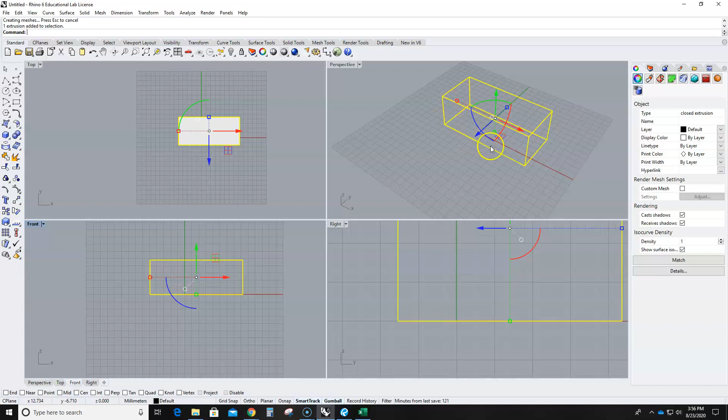This view would be if you're standing here looking that way - that's the front view, or this face right here. And the right view would be if you're standing on the right side of your object looking this way - that's actually this view right here.

And of course your perspective view is your 3D view. For basic navigation, if you right click on your mouse, you can move your view around on the orthographic, or 90-degree, views like top view. In front view, again your right click lets you move. Once you click on a window, it activates that window, and you know you're on that particular window when it turns a bluish color.

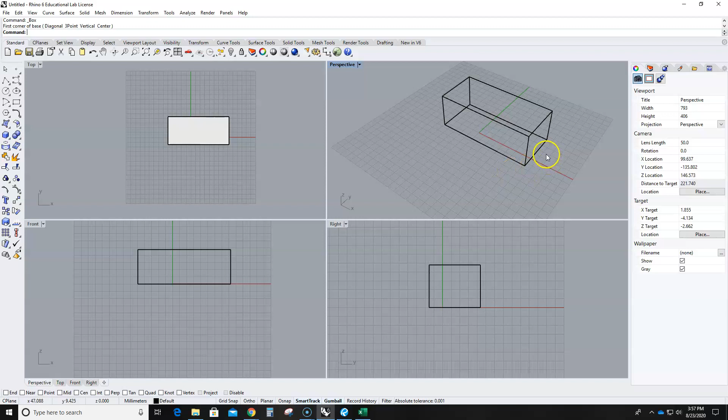So if I click on this, the perspective will turn. Now in perspective, your right mouse button will actually allow you to rotate and pivot. If you hold down Shift and then click your mouse button, it'll allow you to pan. So if you don't hold down Shift, it'll rotate, and if you hold down Shift, it'll allow you to pan.

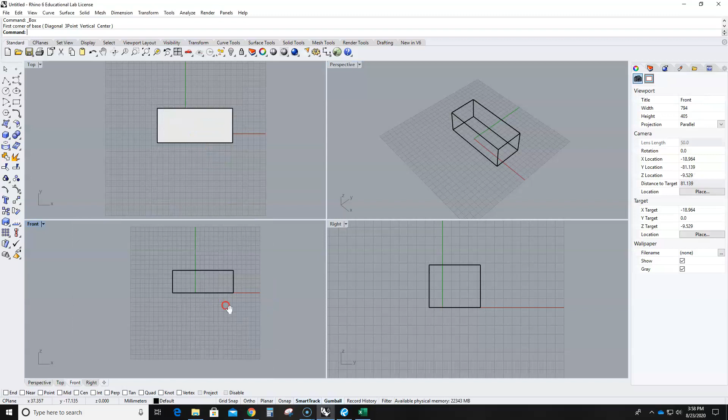And of course, if you're going to zoom in and out of your model, you just use your scroll button. Again here, you just use your scroll button. That's your basic navigation strategy in Rhino.

Before we start our first project, which is a series of tables and chairs, I like you guys to change your units. On the command line, which is up here, just type units - by default it's going to be in millimeters. You want to change that to feet or inches. In this case, we'll just leave that at inches for now, since we'll be modeling smaller projects. And that's it, really.

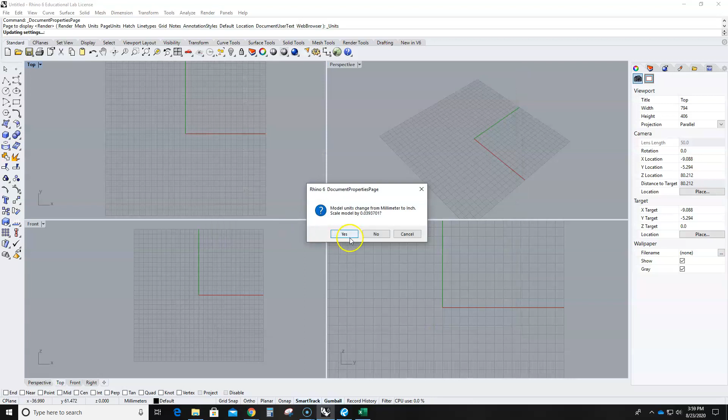So now whenever I draw a line, let's say, and I say make that line 12, it'll make that line 12 inches. 36, and that line is 36 inches. My units are going to be in inches.

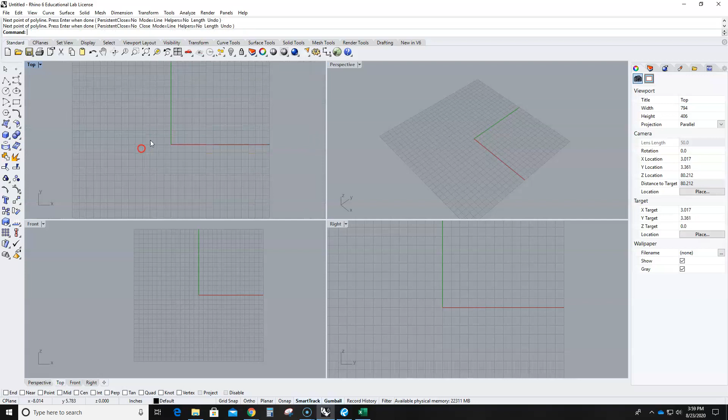So let's first make our first table. For now, I don't really need you guys to worry about the size of the table - we just want to navigate. What you want to do is make sure you're hitting the standard tab, and you'll see that the tools change depending on which tab I'm using. These are just your standard tools, which has some of all the tools we use the most from all the other tabs, so you can see these quickly. Just come down to standard for now.

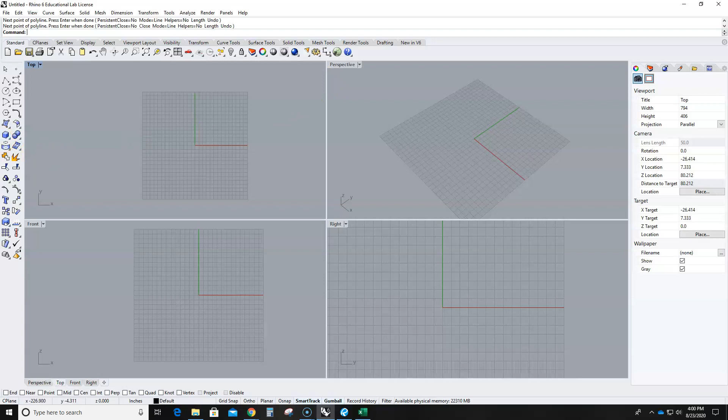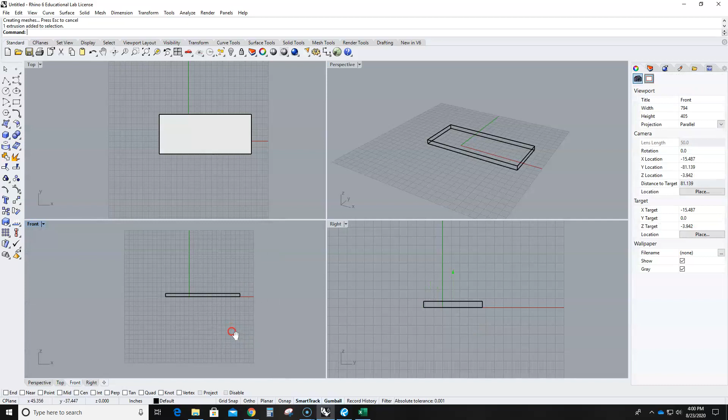We're going to just use a regular box, and we're just going to click and click. If you notice on my third click on my 3D screen, the box is getting thicker. I can move my mouse to the perspective screen and zoom in to make a box that's kind of a tabletop. Notice on my front view, this red line represents my 0, or the floor, so I want the top of my table to be a little bit elevated. I'm simply going to my front view, click on this object, and then you'll see this thing called a gumball.

And if you don't see it, you'll find it here. So if that's off, if you don't see it, you want to make sure that you click gumball. And then from here, you're just going to raise it up to a certain height.

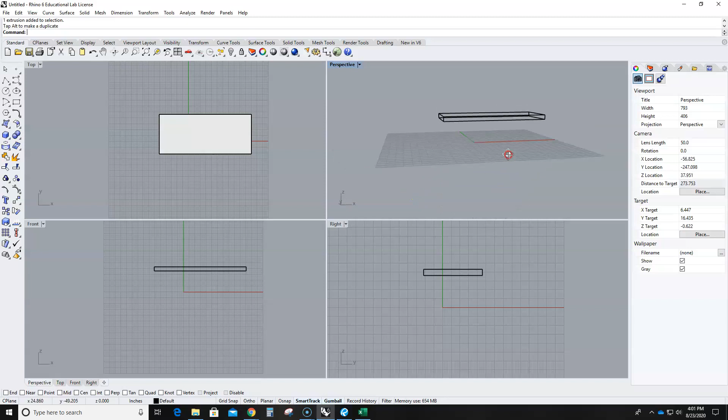I'm not really worried about the height at the moment, but just teaching you guys how to draw a box. And then I'm going to come back to my top view, and I'm going to make a leg table of a certain size, right? And I'm going to go back to the front view here, and I'm going to make my legs.

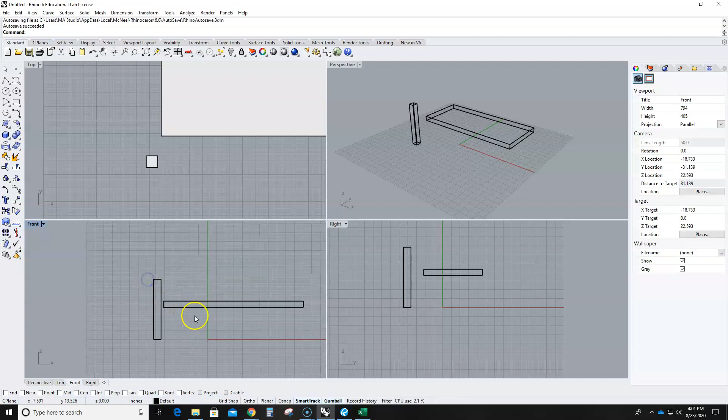Actually, let's make the legs a little taller, which means that I'm going to move my box up a little higher. And then come back here to my top view, and then move my legs to the corner of my table here.

So what I want to do also is here on my top view, I can go into my wireframe so I can see through. And then for now, we're going to just move it.

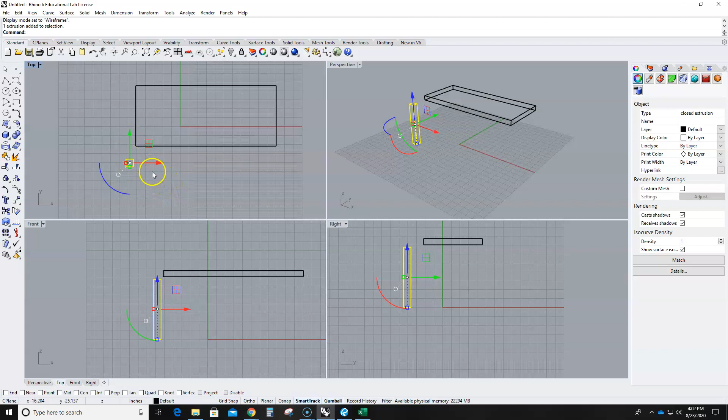So moving things in Rhino is actually quite handy with the gumball. If I hold down this red arrow, or hover over it, I can move it just in the red axis, which is the x-axis. If I hover over the green arrow, I can just move it exclusively on the y-axis. If I hold on to this grid, I can move it kind of freely, right?

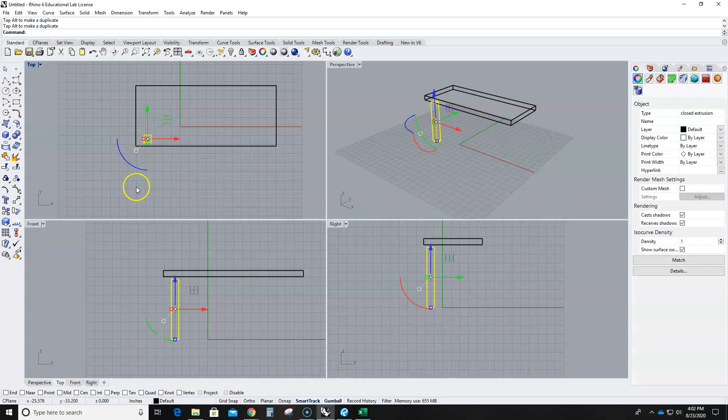So I'm going to just, for now, move it there. And then let's just make sure that these things are snapped together. So I'm going to click here, and I'm going to go to my move command. Instead of just moving it freely like this, I'm going to go to my move command, which is MOVE, enter. And then I want to make sure that I have my object snap on.

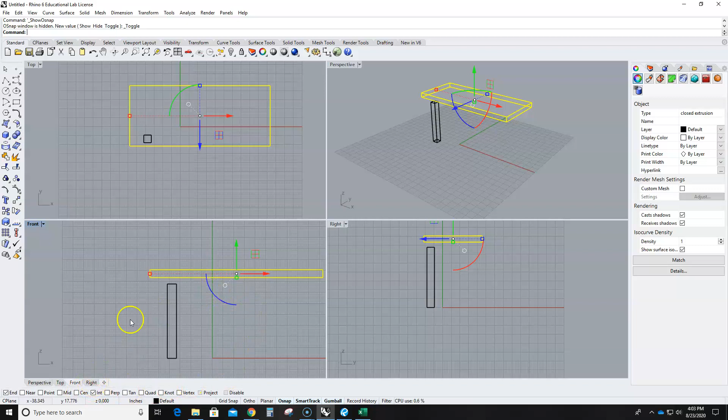When I click on this object snap, I could click on endpoints. That's probably what I want, and I'll probably keep intersection on first. So again, go to move. I'll snap on that and snap on that. So now I know my table is right on the leg, right?

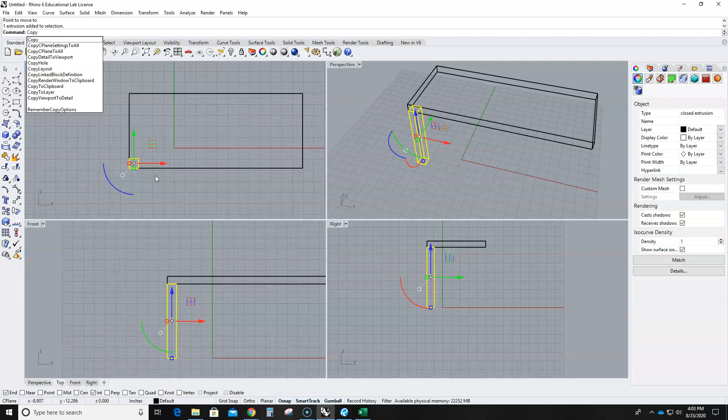So then I'm going to come back here. I'm going to select this. I'm going to make a copy of it. And making copies in Rhino, there's a couple of things. You can actually go to the copy command. So go copy, COPY, and then, now that I have my snap function on, which is endpoints or intersections, I can click on maybe that endpoint and snap it to that endpoint.

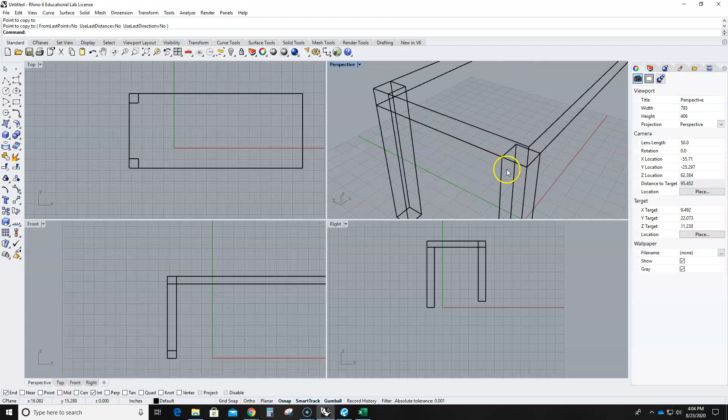And there you go. But an interesting thing happened there. It snapped from the top of my box to the top of my table. So this leg is actually kind of cockeyed, and you can see it on my right side here.

So again, I'm going to go to my move command, and then snap that point to that point, and that gives me my legs right there.

Another way to copy would be to do this, drag my item, but before I let go of my mouse, I'm going to tap the Alt key. You should be able to just copy. So I'm going to do that again.

So I'm going to do what we call a crossing selection. We're doing a lot of different stuff. So I have two legs, that are kind of in this view. You can't see it because I'm looking directly at it. So in order for me to select both, I'm going to click from the bottom right to the upper left, right? That's called a crossing selection. So whatever that box touches, it selects everything.

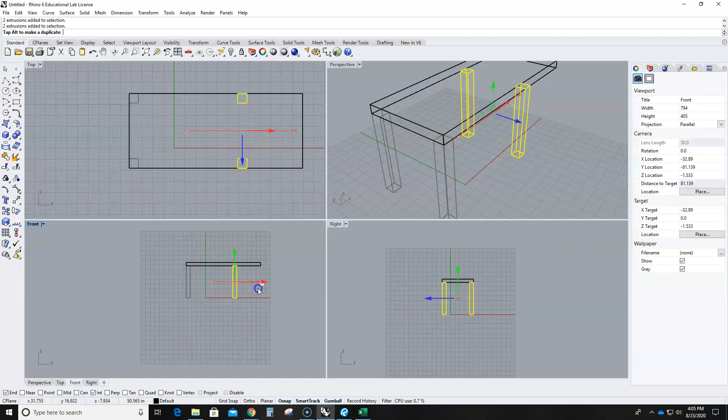So I'm going to do a crossing selection, and as I move, I'm going to tap the Alt button, which gives me a little plus. You can see it on the screen, and I'm going to do that. Before I unclick, I'm going to go to my move command.

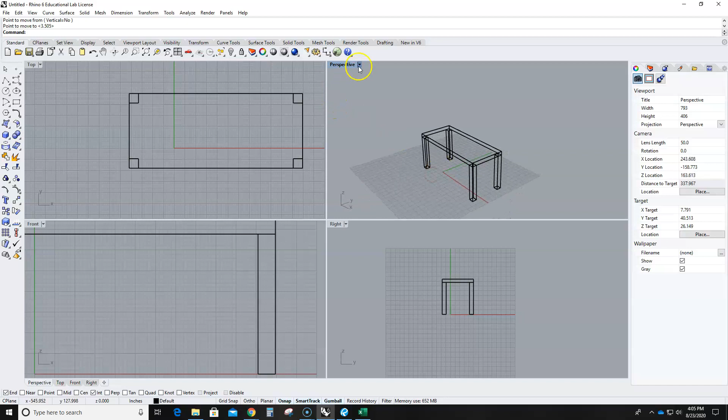That way I can just snap corner to corner. So now I have a tabletop, and if I come to my shaded view, you can see it. Don't worry about the size again, it's just kind of visual for now. I'd like you guys to create this tabletop, and then we're going to create some chairs.

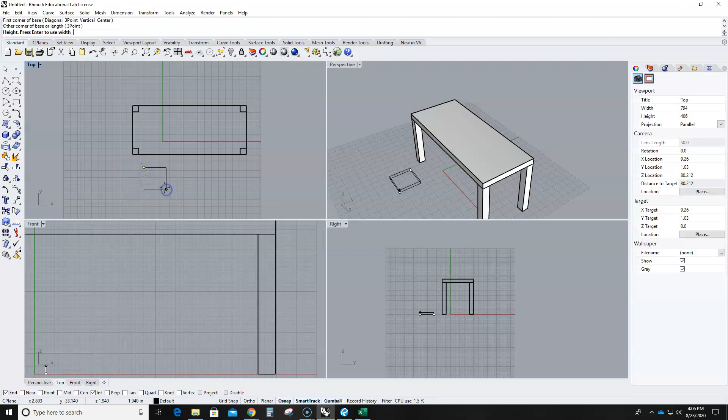So let's go into creating some chairs. I'm going to start off with a simple box, a couple of legs. Maybe we'll do some round legs. If you click on the little triangle, you can do a cylinder.

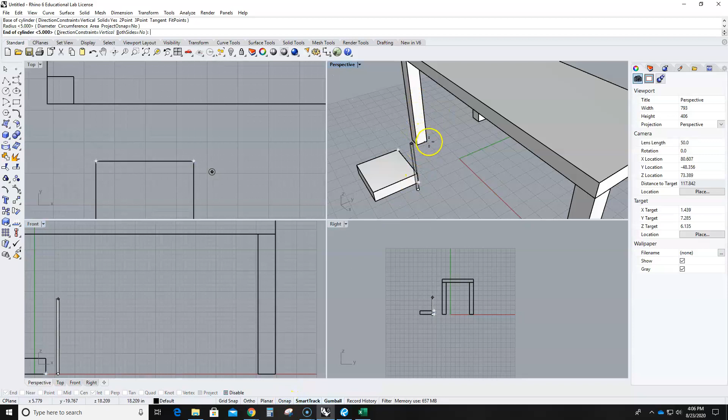And come here to this view. You'll see that it's kind of snapping all the time. So if you turn it off, then it won't snap to other things. Let's make the chairs about that big.

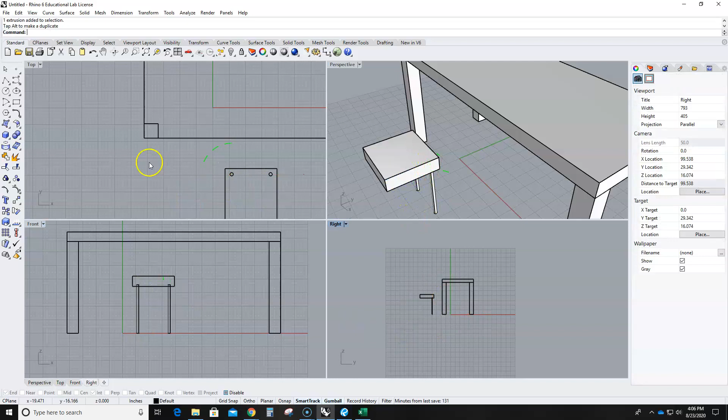Back, hit Alt, take that chair, hit Alt, and I'm going to make a chair back. So chair back, we're just going to simply rotate.

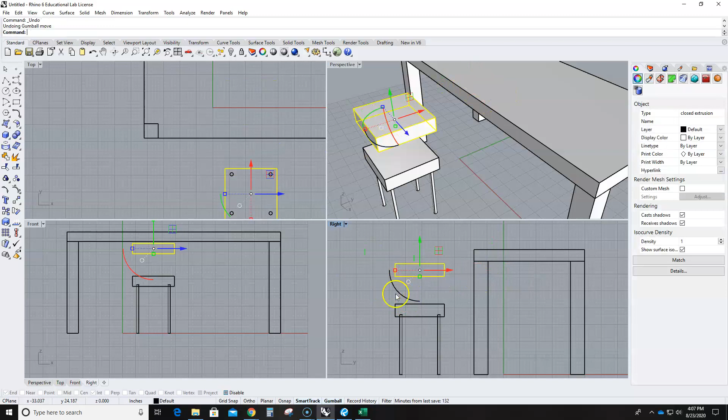What's really good about this gumball gizmo is that you have your arrows that allow you to move left and right and up and down, but you also have this arc button here. If you click that, it'll allow you to rotate your object.

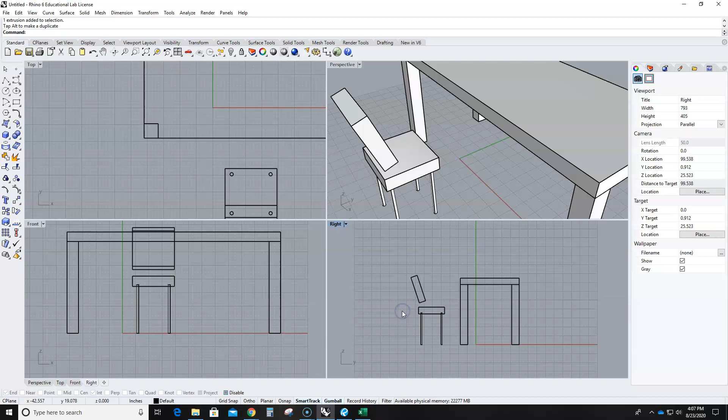I can click that and then rotate my object, deselect, which resets my gumball, then move it back, and then I'm just going to leave it at that. Just kind of give me a chair that looks something like that.

Then I'm going to go to the top view here, select all of this, hit Alt, select all of this, Alt, maybe rotate it. Now if you want to rotate at a certain degree...

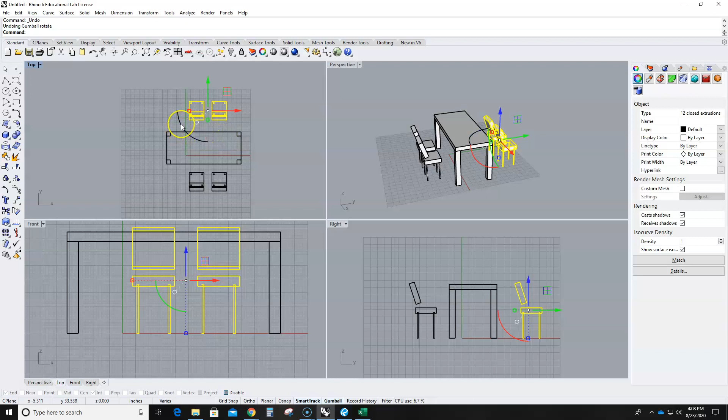If I click on this it'll just do a free rotate, click and drag, but if I click on the actual gizmo, it'll allow me to input what I want to rotate. So I want to rotate that 180 degrees, and then maybe move it underneath here.

I'm going to take one of these chairs, copy it, click on the rotate tab, move that 90 degrees, 180.

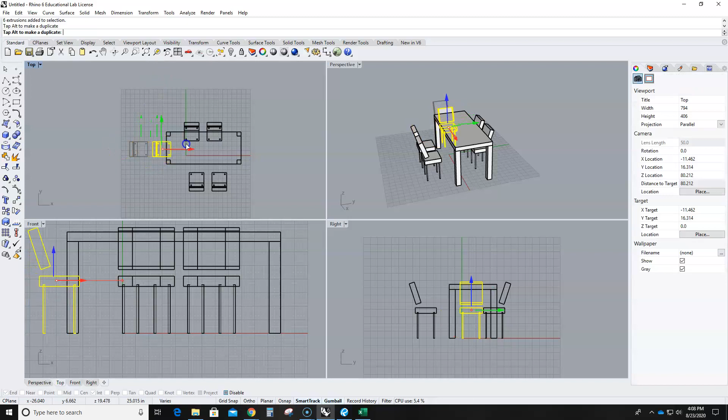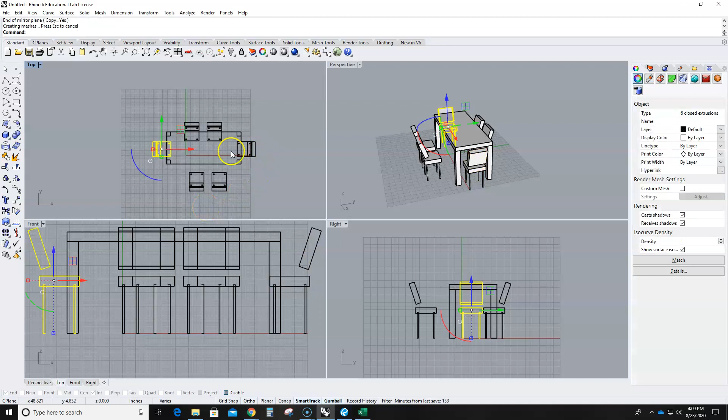While this is selected, I will type mirror, and then it's asking me what is my mirror plane. I can just click and push down the shift button, which allows me to draw a straight line or ortho line. So I'm going to hold down shift and click the other point, and now I've mirrored it.

And I'm going to move these. So right now you guys learned how to create some basic primitive objects, move things, copy things, rotate things, snap things, and this will be the introduction.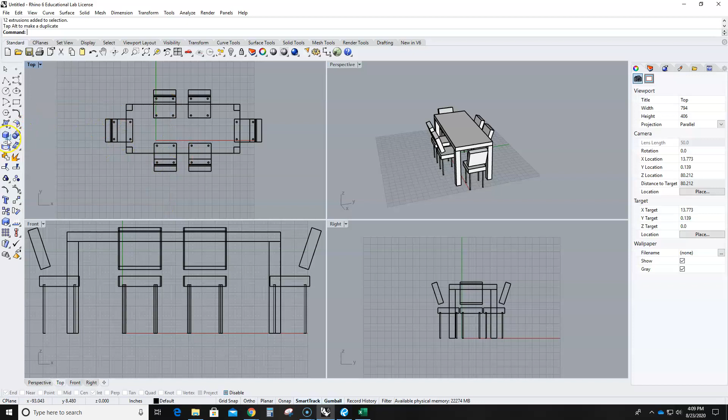I'd like you guys to put some stuff on top of the table, just random things. Go ahead and make yourself a little ball, and then take that ball and place it on top using the 3D stuff.

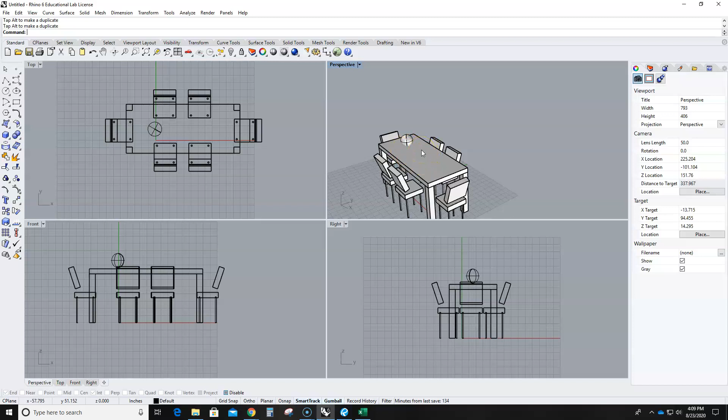And I'll put a couple of table items, more cubes, a little bit of plates, maybe some sticks, whatever you guys need to do. But this exercise is really just to get you familiar with Rhino and creating some basic objects, but more specifically moving things, views, and things like that.

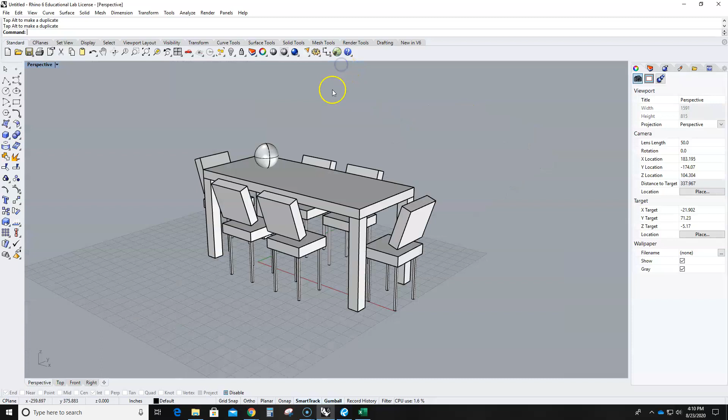Alright, let me see, a couple of other things. If you want to focus on one view here, you can just double click on this item, and then it'll go into what we call a full screen mode. You can double click again, it'll come back out. You can come back here, double click that, and double click back out.

You can readjust, resize the viewports or the 4 quadrants. The shortcut key, instead of double clicking, would be Control M, and Control M toggles you back and forth to the views. So hopefully that's enough for you guys to create this thing.